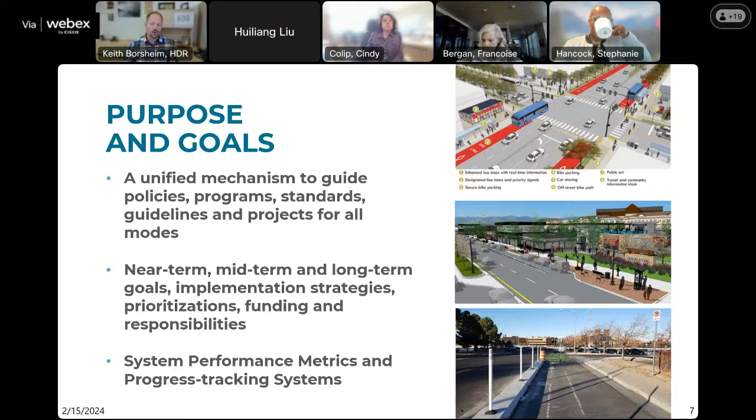A key outcome here will be integrating this into the performance tracking systems that are being created as we speak, and working within that strategic framework so that we can track our progress towards our citywide vision and goals. So that's the overall summary of the project.

I just want to walk through fairly quickly here the scope. So right now we're in the discover phase, the first of four phases of this project. We have a discovery phase, a synthesize phase, a visualize phase, and a realize phase.

Within this discovery phase, we'll be creating a state of the system report that incorporates all of the existing conditions analysis, on things from traffic and safety to what the bike network looks like and what the walking network looks like, as well as transit and transit ridership and usage and how well the system is serving transit needs.

A key part of that state of the system report will be a look at future trends and analysis. So how much more is the city going to grow? And how will technology evolve over the next 15 to 20 years, and how that might impact the things we do on the transportation side.

After that, we'll go into the synthesize phase. That's where we take all of that information and start to create our citywide vision and goals and objectives. Really the focus there is going to be on what are our shared values and our shared priorities as a city, and how can we incorporate that into this vision moving forward.

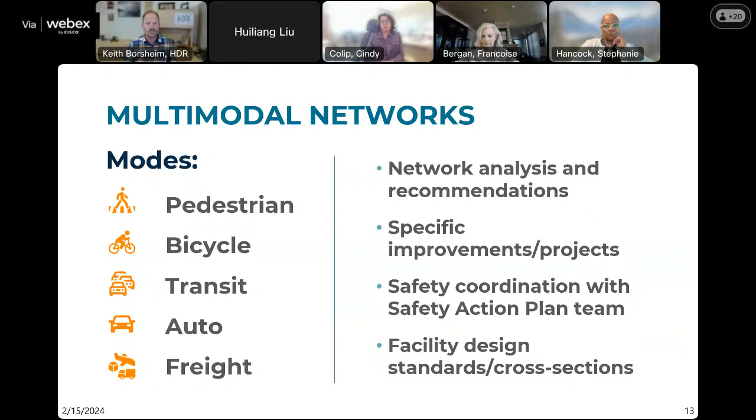All of this really culminates in the development of facility design standards and cross sections that will be updated for the city moving forward, incorporating everything we learn throughout the process.

On the policy and program side, we'll be focused on providing better conditions for all modes, and how we can truly improve the way the city delivers transportation services for people no matter how they move. We will update the current city practices and standards to reflect the outcomes from this plan.

On the implementation side, we'll be focused on a manageable number of evaluation criteria. One reason for that is, as I mentioned earlier, we want this plan to be adaptable and easy to update in the future, so that city staff can work within the framework produced as part of this plan in a manageable way.

We'll weight the criteria so that some objectives may have greater value to the community, based on what we hear through our outreach and engagement, and we'll really want to target desired outcomes with those criteria. This is a tool for the future for the city. We want it to be something that can be updated as the community's values change even in the future.

All of that leads to the production of a capital improvement program, or an update to the capital improvement program. How will we fund these improvements, and what kind of strategies and prioritization needs are we going to encounter?

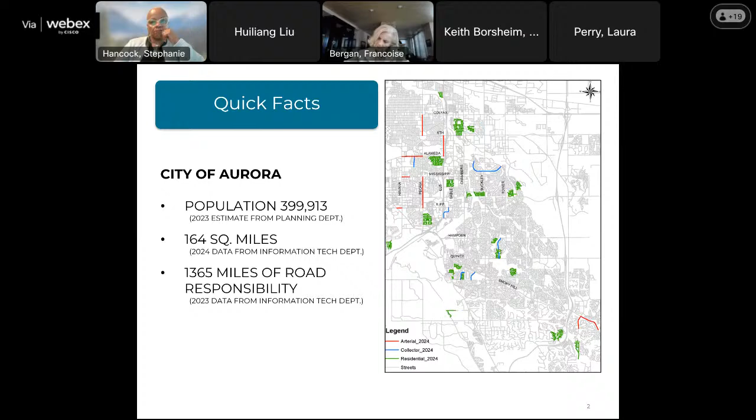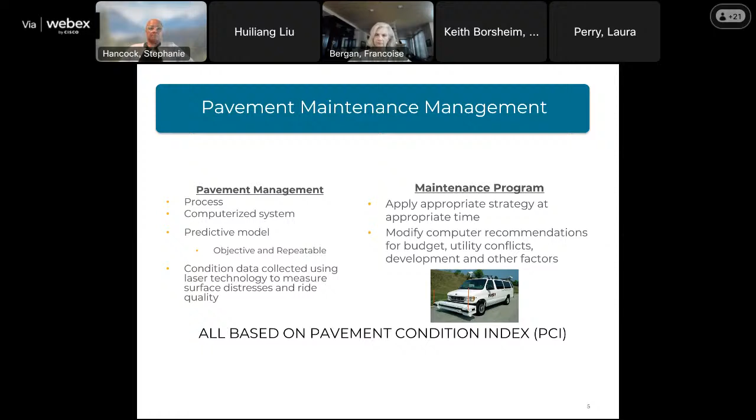All of our decisions are based on a pavement condition index, or PCI. A PCI is made up of a surface condition number and a structural condition number.

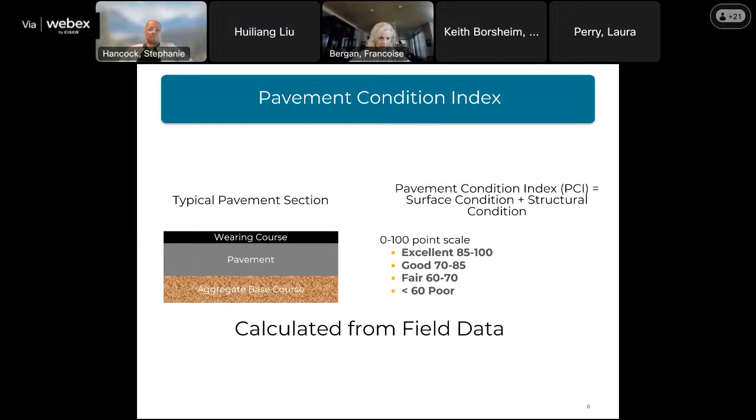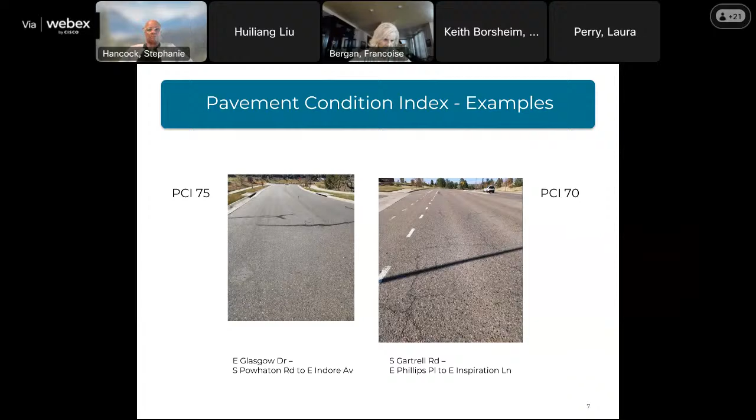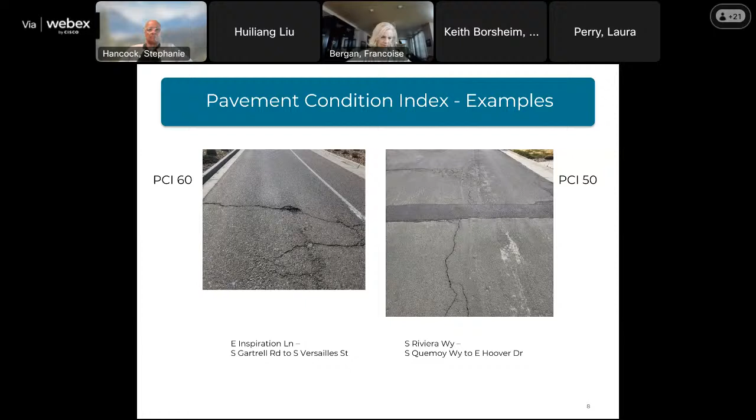Let me go to the next slide. Okay, I'm going to geek out a little bit, so bear with me.

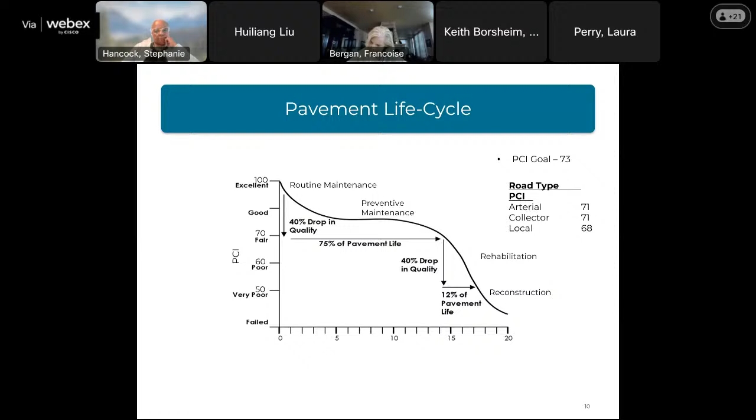After that, from 10 to 15, sometimes 20 years, we get into rehabilitation, which is our mill and overlay, where we remove that wearing surface and put back a brand new one, usually about 2 or 3 inches. Beyond that, the street is completely gone and we have to reconstruct it. We try to stay out of that range—I'll show you in a while why. Can you advance this, please?

So if we can spend a little bit of money when our streets are in fair condition, we can have a really significant impact on the condition of the pavement. To get to that same pavement condition index later in the life of the pavement is going to cost us a lot more money and a lot more work. By doing this, we can actually extend the life of the pavement.

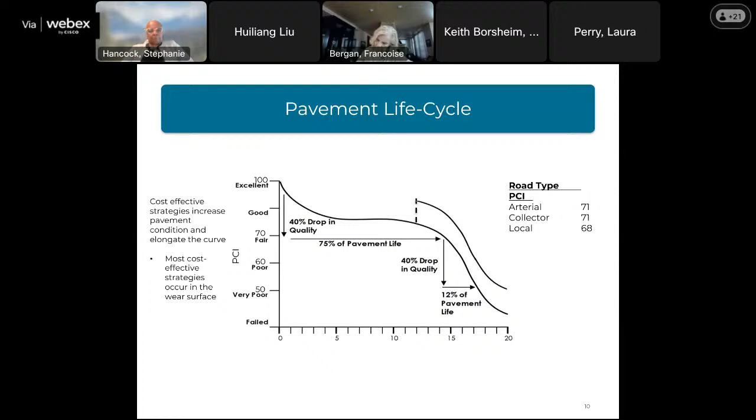Can we do the next one? This is showing where our pavement condition has landed over the years. In 2009, we were at about a 77, and we lost some pavement quality through the years. Last year, with the Build Up Aurora program—Nicholas is going to update you on that a bit—we were actually able to raise our pavement condition overall from a 69, which is what it was in 2022, up to, we think, somewhere between 71 and 72. I'm also showing here the current pavement conditions based on the classification of the roadway.

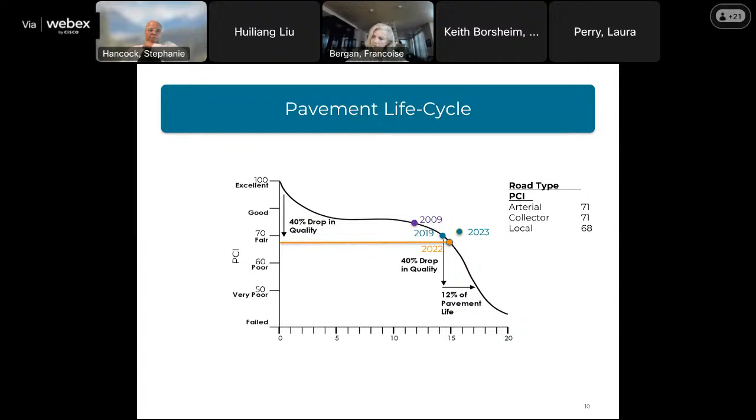What else do we have on this slide? Our history, as I mentioned, in 2009 our overall pavement condition index was around a 77. In 2022, it had dropped to a 69. Then with last year's effort with the Build Up Aurora program, we were able to increase our overall pavement condition index to a 71, with our target still being a 73. What we've shown here on the right-hand side is the history of all the work we've done from 2007 to 2021. We don't quite have an updated map yet, but we'll get one eventually.

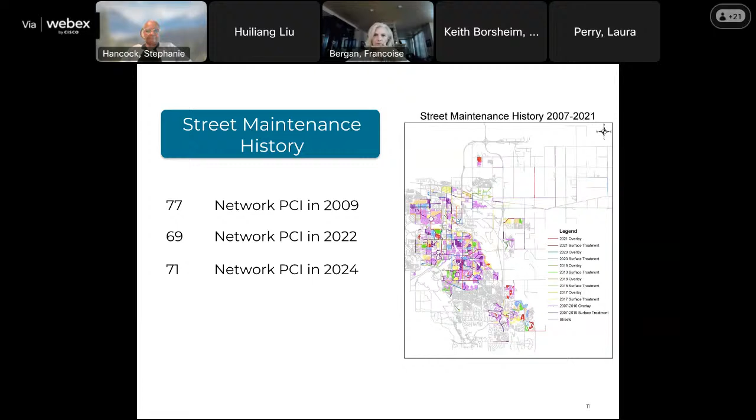So as I mentioned, we have 4 major categories of maintenance strategies. Routine maintenance is that crack fill, usually in the first 3 to 5 years of a pavement's life. Preventive maintenance for us usually is just surface treatment, so that's a slurry seal or a chip seal. You might hear other terms like a hot chip or a double chip. It's all surface treatment, usually applied in the 5 to 10 year range of a pavement's life.

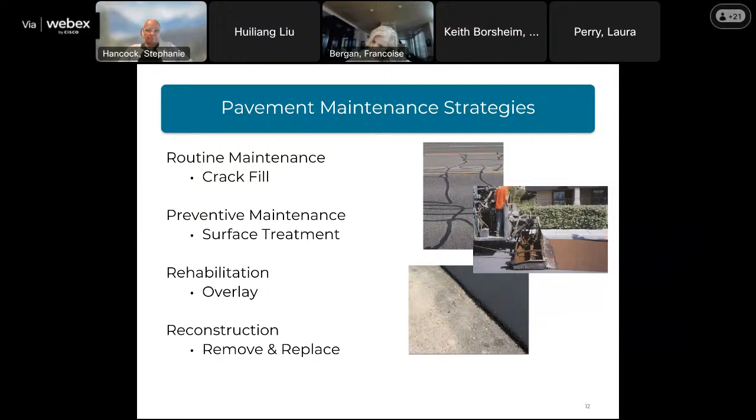Rehabilitation is our mill and overlay, and reconstruction is exactly what it sounds like. We take the street all the way down, removing all the layers, even the aggregate layer, down to native material. We redesign the street for the new and projected traffic and rebuild it. Very disruptive, very expensive. Can we go to the next slide?

As I've been saying, reconstruction is very expensive. So we wanted to show you a cost comparison between the different strategies and reconstruction. We try to stay in that black and light gray strategies because reconstruction can cost 7 to 10 times more than those other strategies. So we get a lot more benefit from our dollar if we can keep our pavement in good condition using the other strategies and not have to reconstruct.

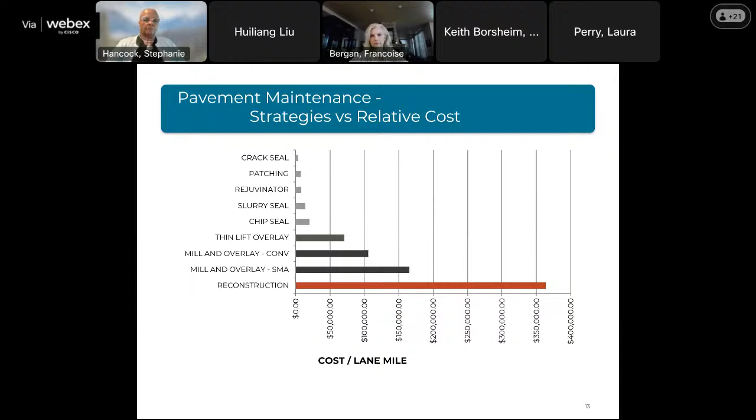And with that, I'm going to turn it back over to Nicholas, and he's going to continue to talk about a little bit more history and then talk about this year's program. Thank you very much, Lynn.

So Lynn touched on this, the rehabilitation program. We developed that using the pavement condition index with the data we collect. That program, while it does put out a recommended 5-year plan, we evaluate it against ward needs, against ongoing projects with other departments, as well as utilities such as Xcel having any large projects in the area, to make sure that when we place any of our maintenance program products down, whether it's a crack seal all the way up to a reconstruct, we're making sure we have the best life possible for that pavement.

So kind of on the third line where it says we're applying the appropriate strategy at the appropriate time: if we run into an issue where, say, one of the roads we'd like to work on is being overhauled with an Aurora Water line project, we have the flexibility in our contract to pause our work on that road and go add another road in a similar area that needs attention, making sure we come back to that after the work is done.

A brief history - I'm going to kind of fly through these couple of slides, but I just want to give you a big picture idea of what's been happening.